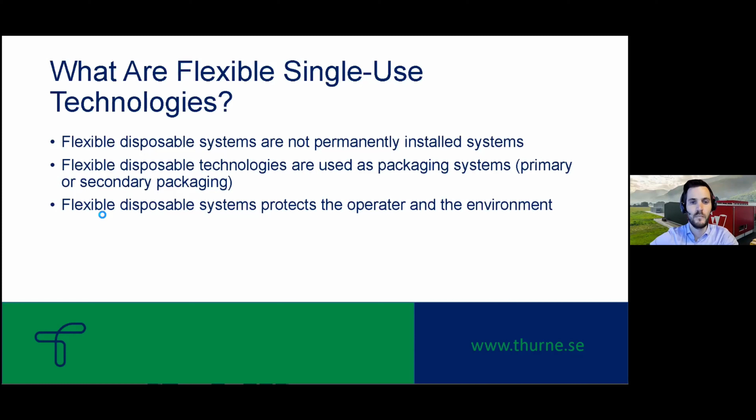So what single-use containments are available on the market? Here we have flexible single-use isolators, single-use transfer systems, flexible enclosures and continuous liner systems. In the following slides, we will get a more detailed overview of the different systems.

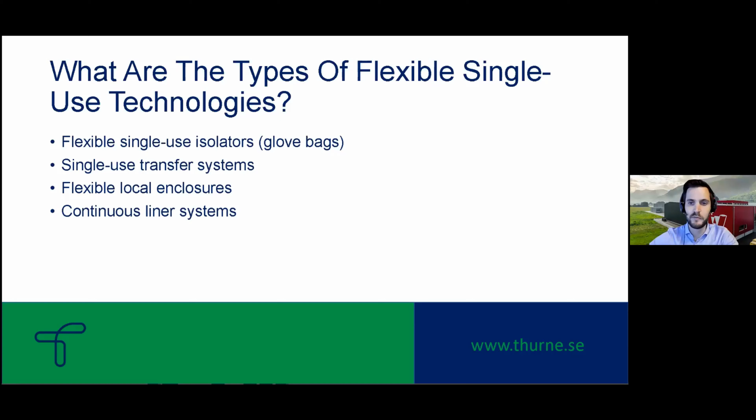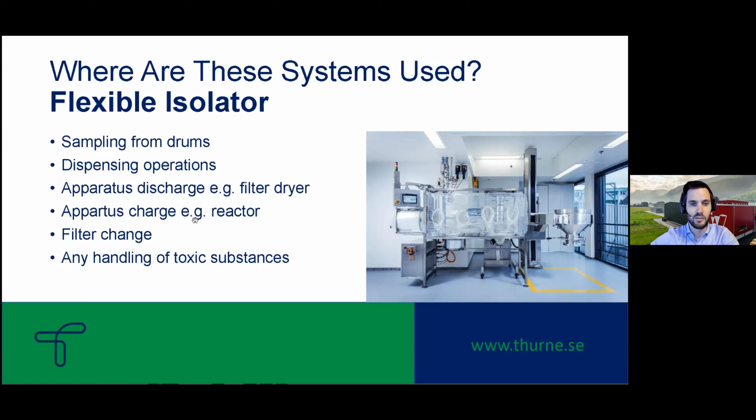First of all, we have the flexible single-use isolator, and the question is where we can use these systems. Basically, the isolator is used to protect the operator and the environment during any handling of toxic substances. More or less the same operations can be made with a flexible isolator rather than a rigid isolator, of course with some advantages and disadvantages of each. But the main applications are sampling from drums, dispensing operations, apparatus discharge or charge, and filter change.

As a next single-use containment, we have the transfer systems. Rather than using rigid containers, here we have single-use transfer bags with different containment connections. Basically, the transfer bags are used to transfer substances into process plants, discharging and charging powder from different apparatus.

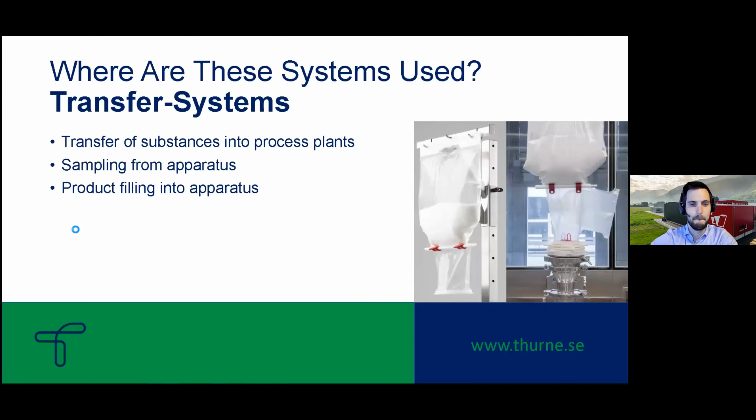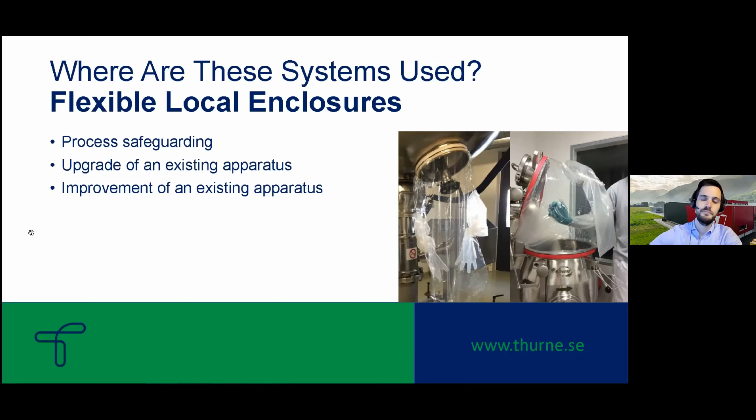Finally, we have continuous liner systems. Continuous liners are basically used to continuously pack powder in a contained way. In this case, we talk about primary packaging because the product is in direct contact with the film material.

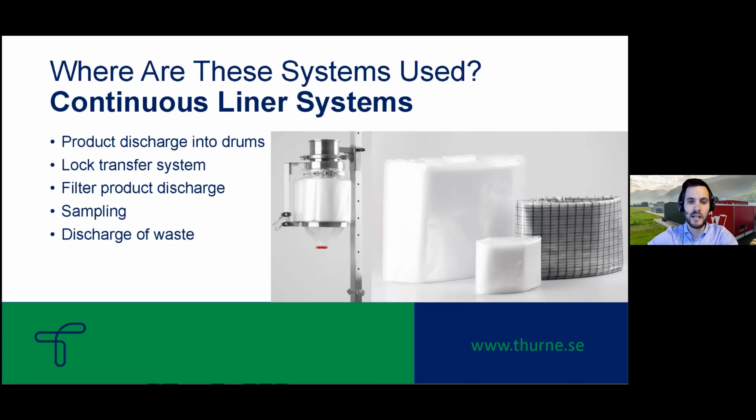All the containment systems shown before are completely tight in itself, but every single-use containment needs to be closed and separated somehow. As this is the weakest point of the whole containment system, it is very important to use a suitable closure system. Here we make the difference between mechanical and thermal closure systems.

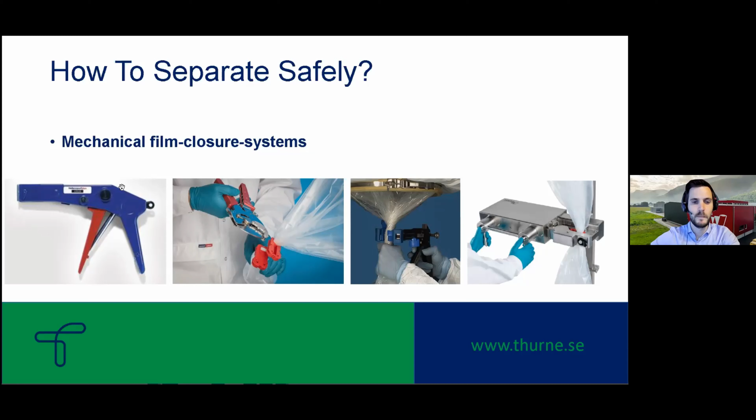When we look at the advantages and disadvantages, on the plus side, we have very easy handling. There is no temperature influence on the film or on the substance inside. It's very universally applicable, can be used in ATEX areas, and we have low investment costs. On the negative side, we have higher consumable costs, and it's manually operated and thus cannot always guarantee a uniform closure result.

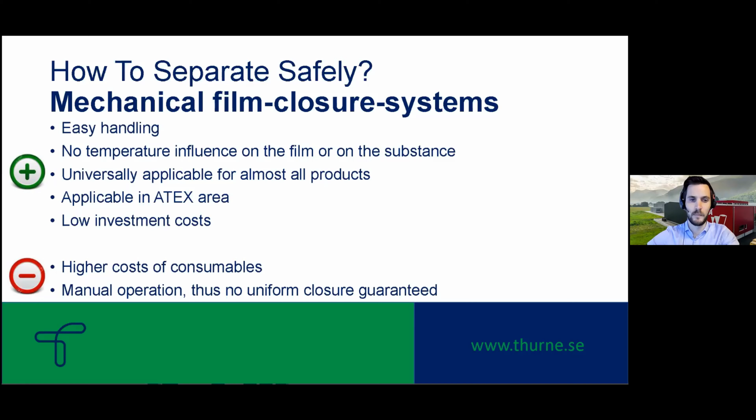Then it is also possible to use thermal film sealing systems as shown in these pictures here on the presentation.

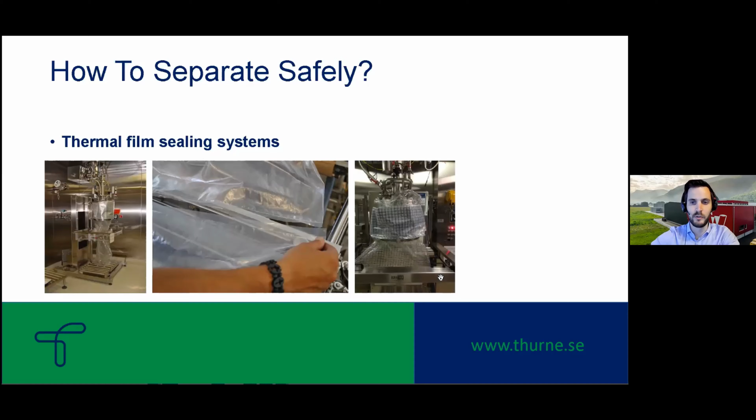Here on the plus side, we have the high containment level and the uniform closure result because it is controlled over the machine. On the negative side, we have to take care because some substances do not allow welding. We have higher investment costs, especially for ATEX executions. And finally, it may be difficult to handle because we have to take care that the film material is in a flat way without wrinkles and that there is no product on the inside of the film.

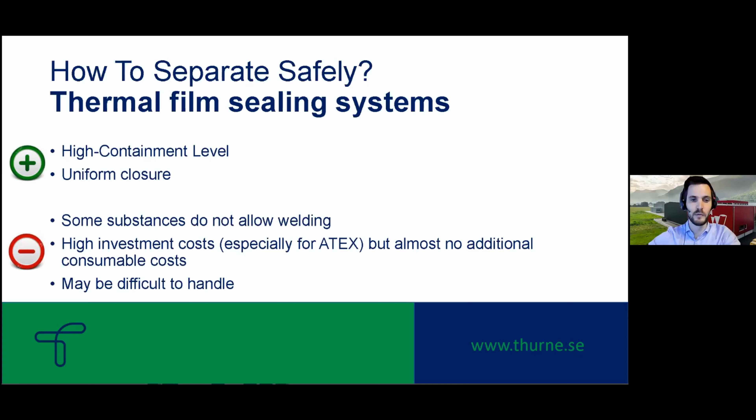Now we are looking at the different film materials that can be used for single-use containments. So the question here is, what are the types of materials that are used for the single-use containment solutions that I showed you before?

For isolators and flexible enclosures, mainly PU, polyurethane is used because it has very high mechanical resistance and clear visibility. That allows high flexibility and ergonomic handling while working with a single-use isolator, for example. The PU material is available in anti-static versions and offers FDA approval. We just need to take care because the PU material is not resistant to all solvents.

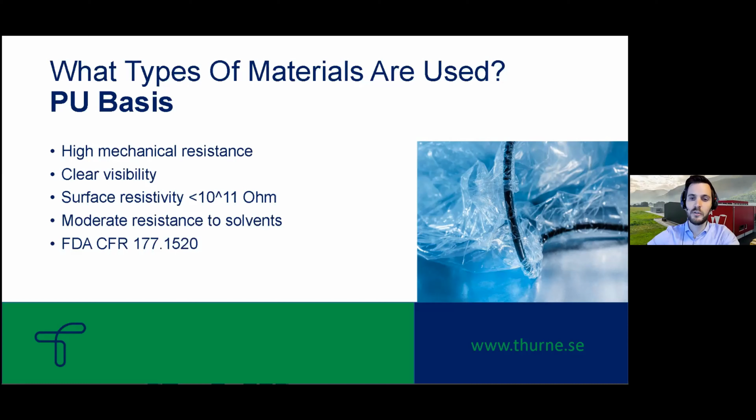For the other single-use containments like continuous liners, we have PE, polyethylene. For example, the continuous liners are used as primary packaging. Therefore, it is important that the type of PE and the approvals fit together with the substance and the requirements of the discharging environment. PE is available in many different types with different approvals. For final packaging, mainly a PE without any additives or pharma-grade EP and USP approvals is used. For ATEX areas, there is a PE with anti-static or electrically conductive properties.

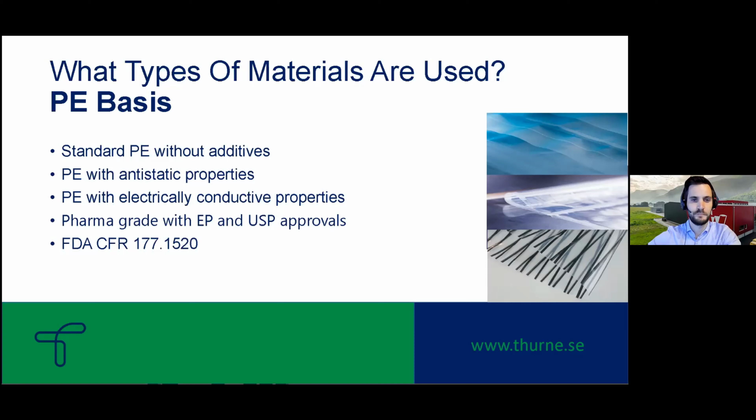When designing a single-use containment, it is important to know the restriction of containment level for a dedicated process. In order to use the correct single-use containment for the related application, we can say that open bags with local suction can be used for OEB1 up to OEB2. For OEB2 up to OEB5, we can use single-use transfer bags and continuous liner systems. Single-use isolators are mainly used for OEB5 applications.

So a combination of the two systems may allow reaching a higher containment level as well. For example, a continuous liner which is placed inside an isolator.

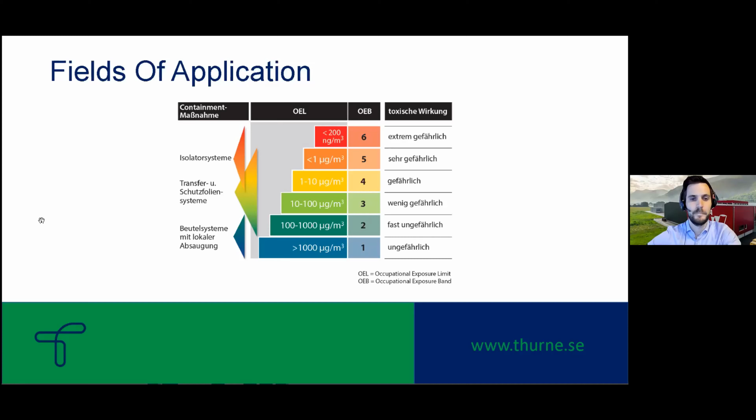In any case, single use may be a good alternative to rigid systems under consideration of some advantages, such as better operability, reduction of cleaning effort, and waiting times. But of course, the user has always to consider the consumable costs versus the investment and running costs for the cleaning and the revalidation.

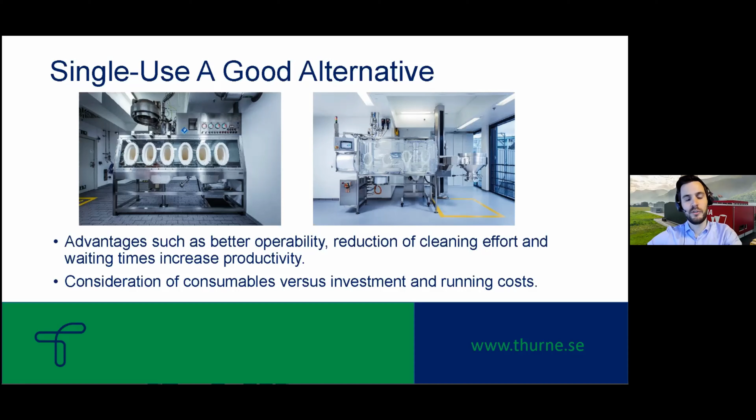Here on the picture, we see a comparison of the rigid and single-use systems. For different reasons, here the customer decided to switch from the existing rigid system on the left side to the single-use version on the right side, offering the same functionalities.

Okay, so next slides. The next slides will give you an insight into a case study we realized for a containment project with a pharmaceutical customer in Germany. When designing a containment solution, it is very important that the customer and the supplier work closely together. First of all, it is important to know and to define the process and the requirements.

Here in this case, the requirements of the customer were to manufacture an OEB4 compound. It is a straightforward manufacturing process for film-coated tablets. The existing equipment currently does not achieve the OEB4 containment level, and therefore some retrofitting is required.

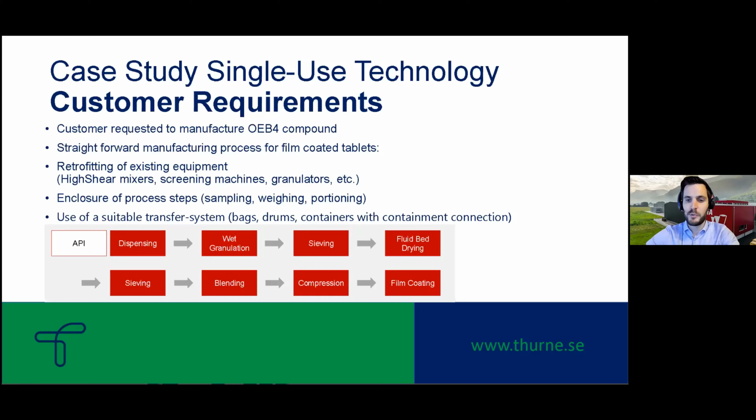The first process step, dispensing, is currently handled under a laminar flow and needs to be upgraded to reach OEB4 level. It is intended to use a suitable OEB4 transfer system to transfer the product from one to the other equipment for the following process steps.

So the process steps in detail are: the API coming in drums for the dispensing over a single-use isolator. After that, we use a single-use transfer system for the next step to the granulation. From the granulation as well, transfer system to sieving. After that, to drying, then again to sieving. After that, to blending, compression, and finally to film coating.

So this is the whole process that needs to be worked with any single-use system.

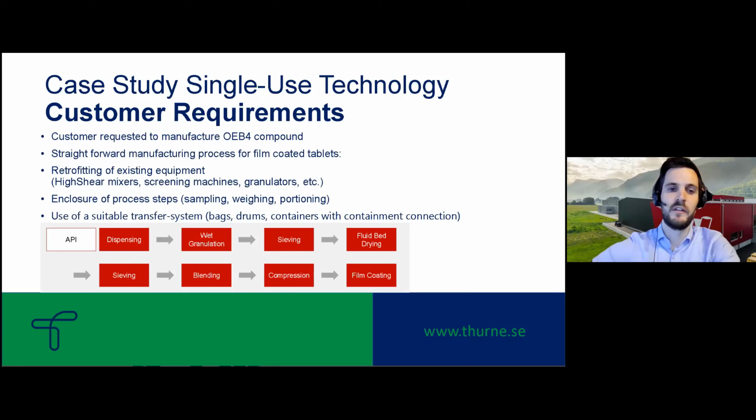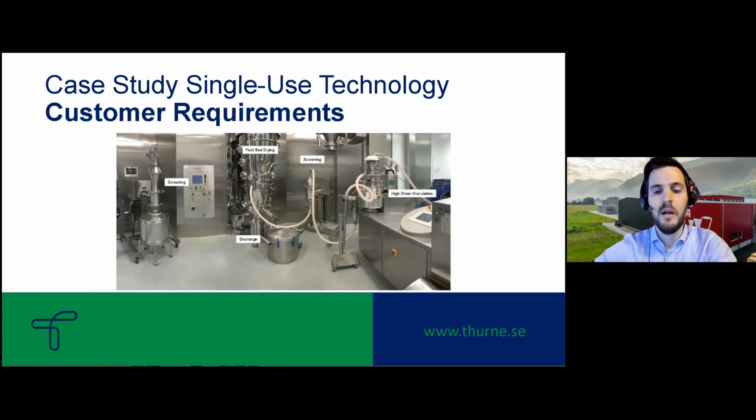In this picture, we see an overview of a part of the current production with different apparatus like screener, dryer, granulator, and so on. Some of the transfer steps are currently made with vacuum powder transfer system. The problem here is an exposure of powder while disconnecting the tubes. It is intended to replace the tubes by a single-use transfer system to reach OEB4 level at least.

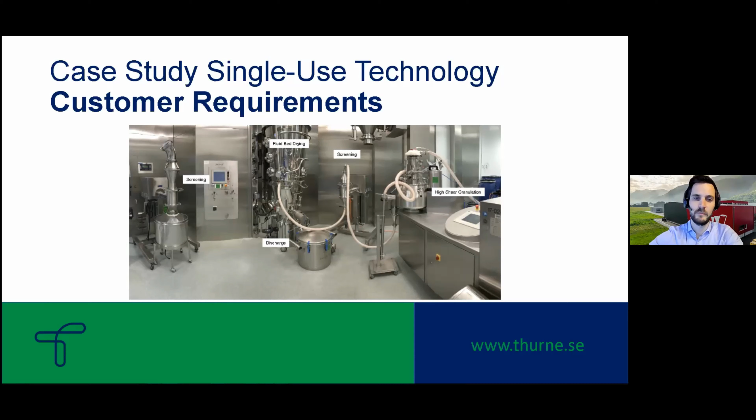Now we go back to the first process step, dispensing. If you remember, currently it takes place under a laminar flow. In order to improve the containment level, we proposed a single-use isolator.

Therefore, first we made this conceptual design. For the single-use isolator, we do not have any standard executions. This means every isolator is designed according to customer requirements in different dimensions and with different connection possibilities. The conceptual design is very important to define the design together with the customer and serves as a suggestion and basis for discussion.

In detail, this isolator has a connection on the backside to connect the drum, which brings the API. Furthermore, we have a continuous liner on the left side, which allows transferring waste, samples, and equipment like the balance inside in a contained way.

A small balance is placed inside the isolator to take samples of the API. The samples are then transferred through the continuous liner out of the isolator. As soon as the drum is connected, the API can be transferred through the isolator into the transfer bags, which are connected on the left side underneath the isolator. The transfer bags themselves sit on a balance as well to make the appropriate portions.

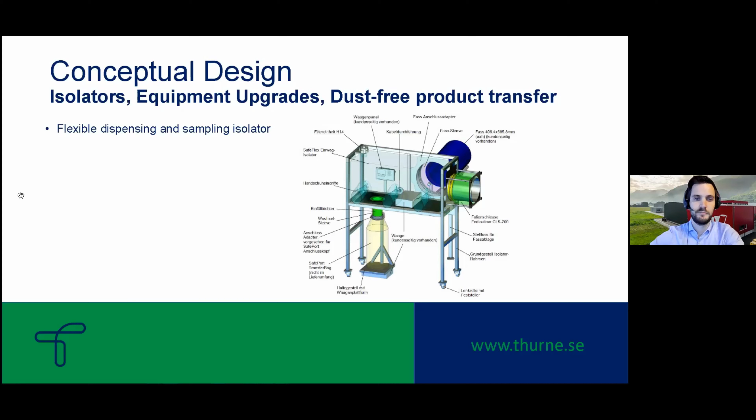Looking at the isolator in more detail, it is made of PU, which offers a very high tear resistance, clear visibility, and flexibility for ergonomic work.

The isolator is really easy to attach in a metal framing by tabs with push buttons. Even a replacement of the isolator can be done within about 20 minutes, also because no cleaning and revalidation is required.

Furthermore, the isolator has a magnetic base plate at the bottom. Because the ground of the frame is made of a special magnetic stainless steel, the isolator with the magnetic base plate can be attached to it and serves as a flat work platform which does not move around.

Every isolator is equipped with an integrated H14 single-use filter, which is used for breathing while working with the isolator. If a ventilation system is required for inertization, for example, it's also possible to integrate more filters in the isolator so that we have an inlet and an outlet, as well as one filter to take measurements.

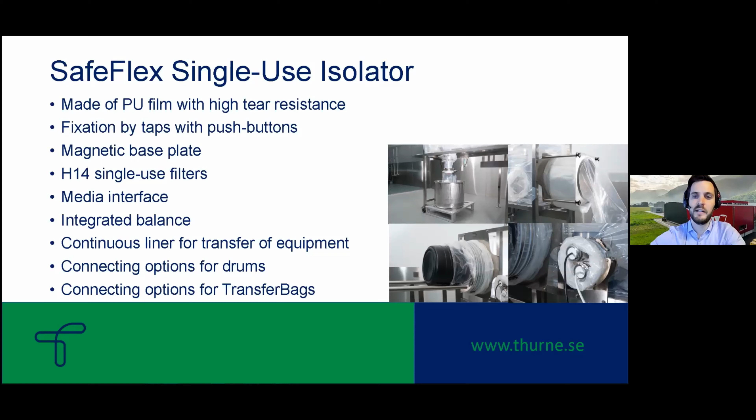Also, different interfaces for media supply are possible to integrate in the isolator wall, like we see on the picture on the right side below.

Finally, here we see the end result for this flexible isolator, which is in operation at the customer facility. As you can see, the operator can work with almost no PPE because he is protected by the isolator.

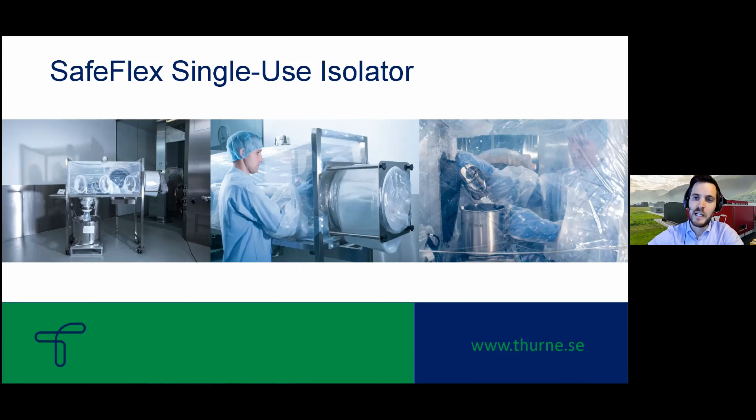According to different measurements we made, a containment level of at least OEB5 is reached by this isolator.

For the next process steps like granulation, sieving, drying, sieving again, blending, compression, and coating, we proposed to use a single-use transfer bag system like on this conceptual drawing. This transfer bag has two connections, and with the interface on top, the transfer bag is connected to the dispensing isolator as shown before.

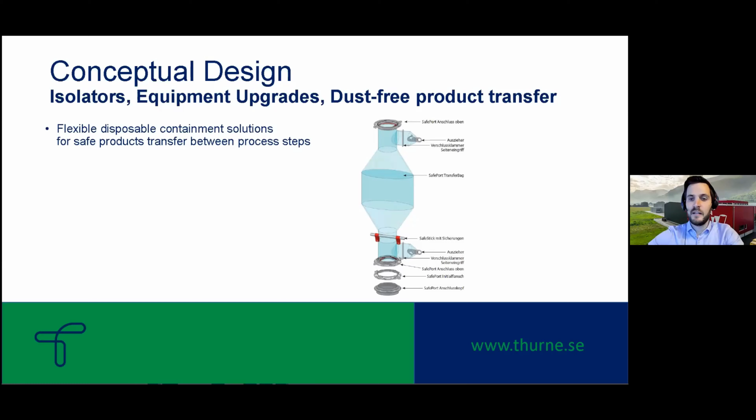Afterwards, the product is transferred to the next machine, connected by the interface below to discharge the product. This transfer bag is equipped with a special flange which we call SafePort. The special feature of this SafePort flange is that it allows connecting several bags on top of each other on the same port without opening the process.

The whole system is designed to reach a containment level of at least OEB5 and therefore fulfills the OEB4 requirements of the customer. Because the API is here in direct contact with the bag, the film material of this bag can be customized as well. This means the bag can be made of a customer-specific film material with appropriate approvals like FDA, EP, or USP.

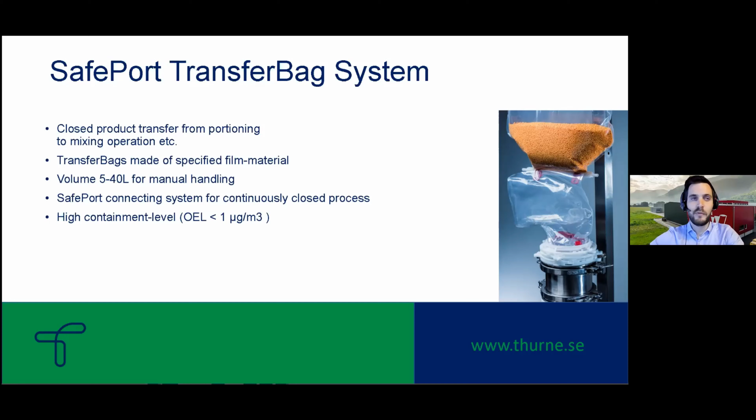And it is designed for manual handling with volumes from 5 up to 40 liters. Here on this slide, we can see how the bag is connected to the equipment to charge the API into the bag. So this is the first step. The transfer bag is connected to the machine, then charged with the powder.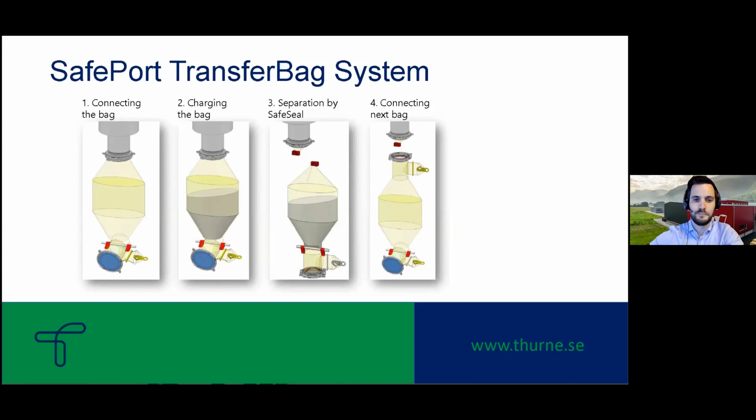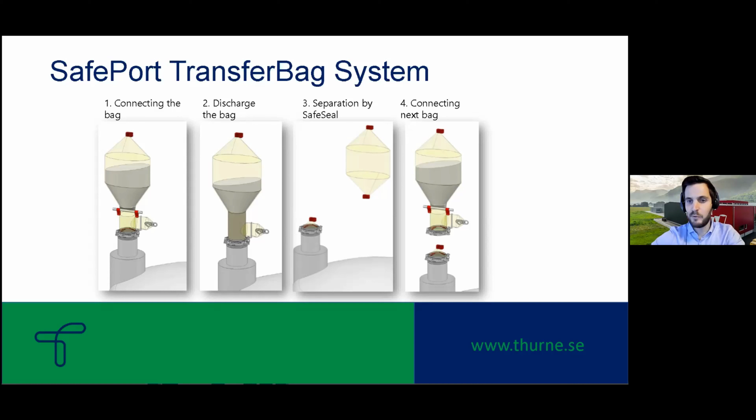The same applies for discharging the API into equipment. I will show you a video later on to explain the connecting procedure in detail. Both operations, charging and discharging, can be repeated on every equipment and thus allow a continuously closed process.

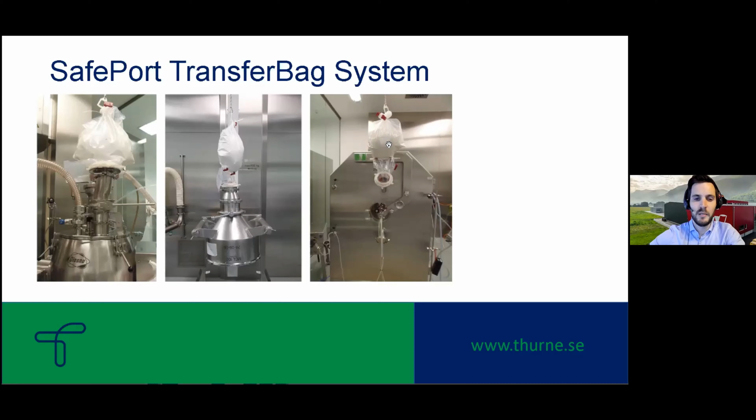Finally, here we see the final result with the SafePort transfer bag system in operation at the customer facility. I'm not sure if you can see it here on the picture rightmost, but there are already the compressed tablets to discharge into the coater. All the process explained before is made using single-use containments.

But of course, there are also some advantages and disadvantages to consider while planning a containment solution for a dedicated process. On the plus side, we have low investment costs, it's very well customizable, we have very ergonomic handling, reduced cleaning costs, and therefore we also save time.

On the negative side, sometimes the film material is not resistant against solvents or temperatures. Sometimes it's difficult to work if there is positive or negative pressure. Then we have some limitations for using it in ATEX areas depending on what film material we use. And then we have the higher consumable costs.

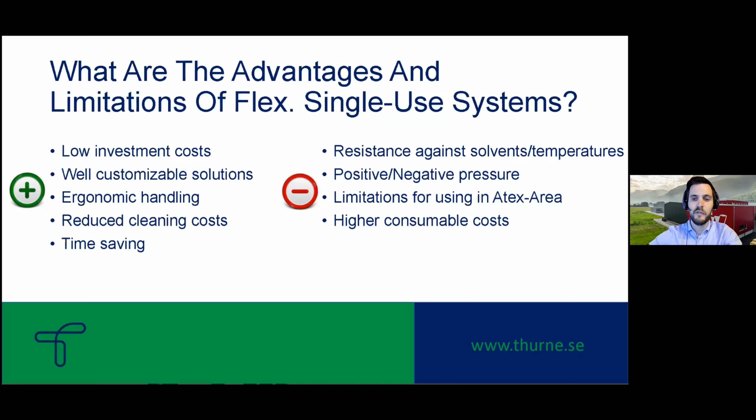The presented single-use project has been summarized by the customer as follows: we have a successful implementation of the manufacturing process with OEB4 substances. We had a collaboration with the customer from idea to production. The risk assessment must be carried out individually and is strongly dependent on API properties as well as the manufacturing process. And containment solutions helped establish the process for available devices.

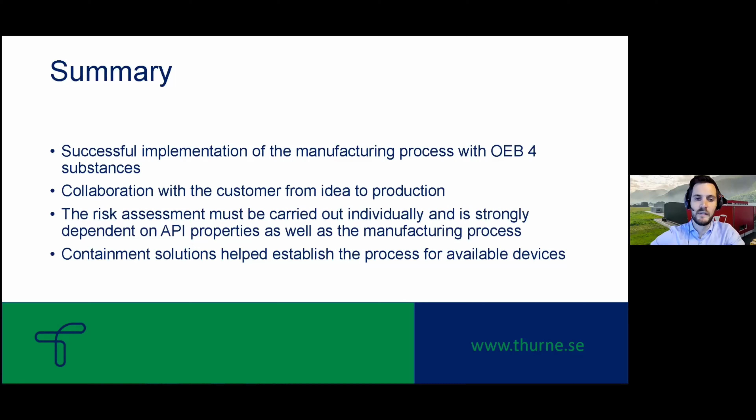Finally, I would like to show you the video announced before. It will give you also an overview of the process that I explained in the previous slides. Here you see the setup with the single-use isolator. On the right side, we have a ventilation system to vent the environment from the isolator. We have the balance here where we can connect the transfer bag to make portions. On the back side, we have a big connection to connect the drum, which brings the API.

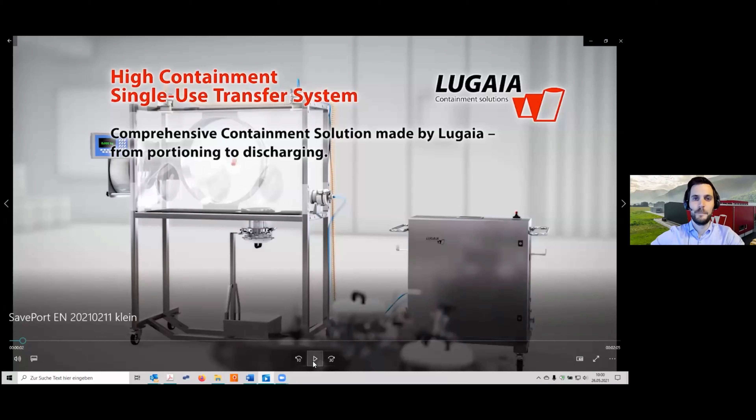First of all, the isolator is vented. After that, we can connect the drum by a special connecting sleeve, and take out the product bag with API. After that, we connect the SafePort transfer bag system, remove the previous piece from the previous bag, open the bag inside the isolator, and take out the product to make the portions.

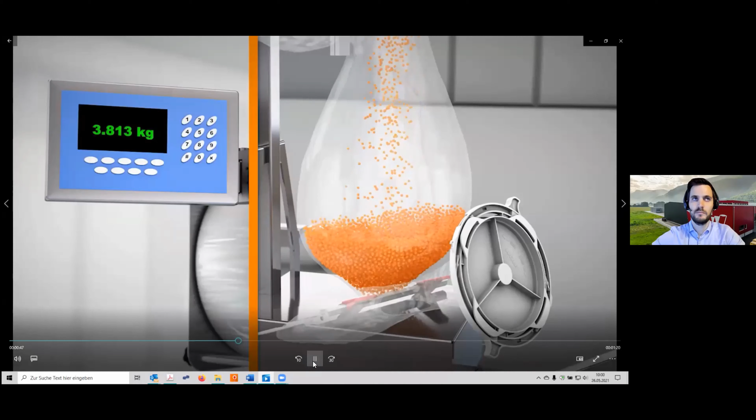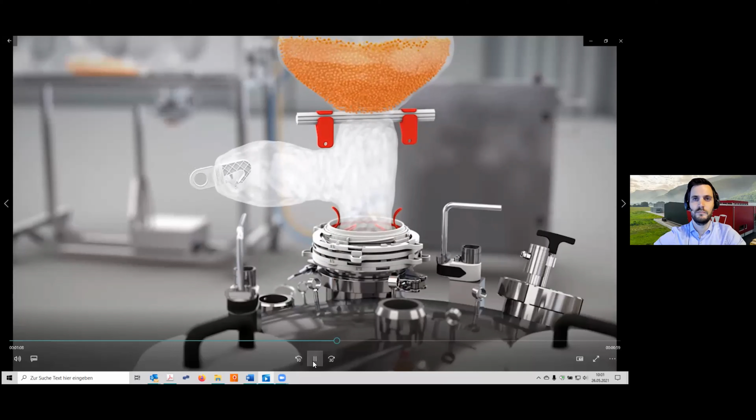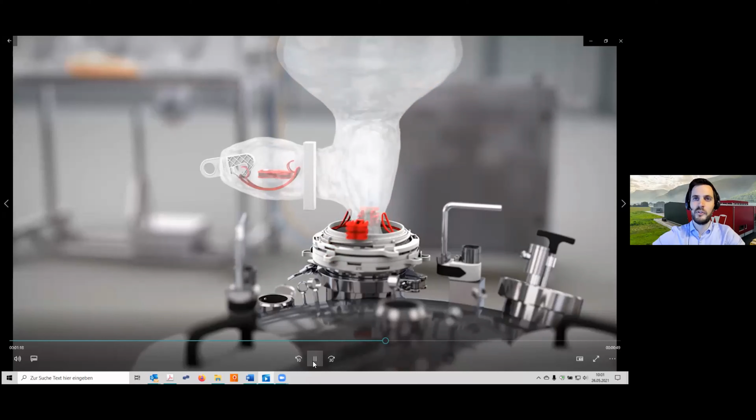After that, separated by the Safeseal crimping system, transferred to the next equipment. The product is then discharged into this equipment, and finally closed and separated again with the Safeseal crimping system.